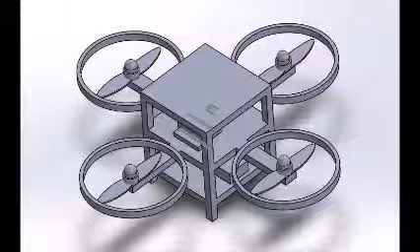Early in the stages, we went through a lot of iterations for our quadcopter. This on your screen now is our first iteration. As you can see, it's not very detailed, that's a schematic of it. We went through a lot of these, here's another one. We really tried to take input from all of our group members and put it into one that we could all be proud of, so everyone got a little piece of their quadcopter that they wanted in there.

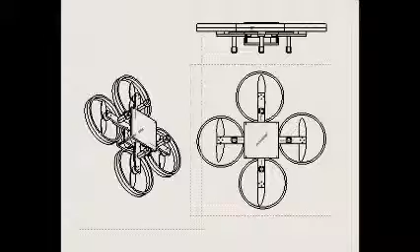This is the final design we went with for our quadcopter. As you can see, we went to choice with big, broad prop guards and the landing gear that comes off the wings. Now we're going to show you the parts we manufactured in the lab.

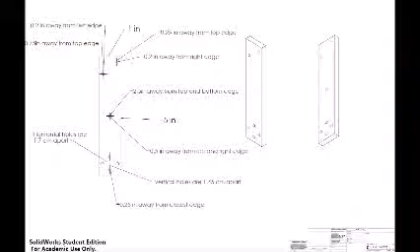These are the prop guards we made, which is just another ring stacked onto there to make the full prop guard. And then these are the wings, four of them. It was actually really hard to get them symmetrical with the screws and drilling the holes and all that. And then these are the bases. We also had to make lots of different holes in those to get everything we needed on there.

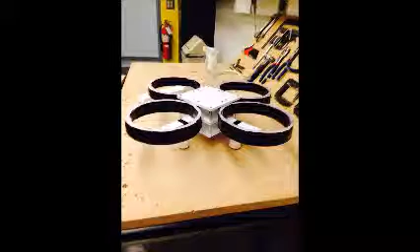And then this is our final design we went with. It turned out pretty good in my opinion. I really like the feet on the landing gear.

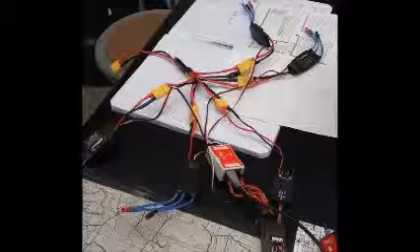That's it manufactured in lab and all set out before we put it on the quadcopter. And then this is it actually all put together on it, and that's where we ran into our problems, but I'll talk about those later.

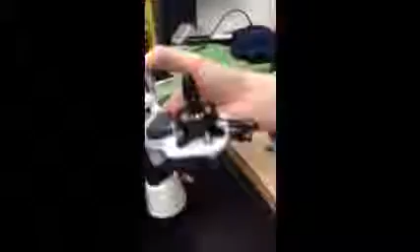We ran into some electrical issues regarding one of the motors, where we'd calibrate the NAZA, but one of the motors wouldn't recognize that it was calibrated. So in order for it to turn on, you'd have to tilt the entire system. It was basically like the NAZA thought level was tilted at about a 30-degree angle, as you see in this video, and no one knows exactly why. This is where we ran into most of our problems.

But I know if we had just had another week and not stuck in the 10-week parameter, we would have been able to make it fly very easily, in my opinion.